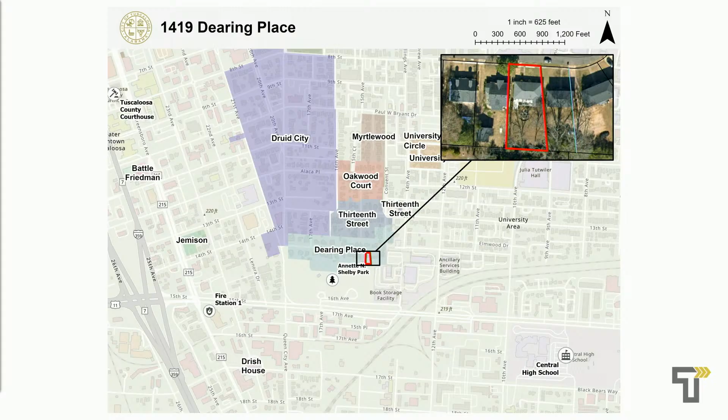This is coming to you tonight as a violation case. On April 10th, 2026, the city issued a stop work order for the construction of a deck without HPC approval. But prior to the stop work order, the petitioner had replaced the existing deck, altered the orientation of the steps, and constructed most of a roof extension over a portion of the deck area. The deck sits at the rear of the primary structure and is not visible from the public right-of-way.

Tonight you're considering the approval for alterations to the existing deck. The total size of the deck will be 34 by 12 feet, not including the stairs, and will be constructed of wood. The deck extends an additional 4 feet to accommodate a new landing that's 4 by 4, with 9 sets of steps leading down to the rear yard.

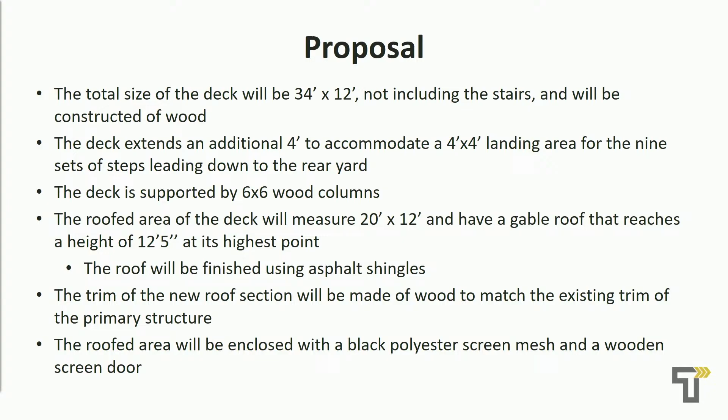It's supported by 6 by 6 wood columns, and there will be a roofed area of the deck measuring 20 by 12 with a gable roof reaching a height of 12 feet 5 inches at its highest point, finished with asphalt shingles. The trim of the new roof section will be made of wood to match the existing trim of the primary structure, and it'll be enclosed with a black polyester screen mesh and a wood screen door.

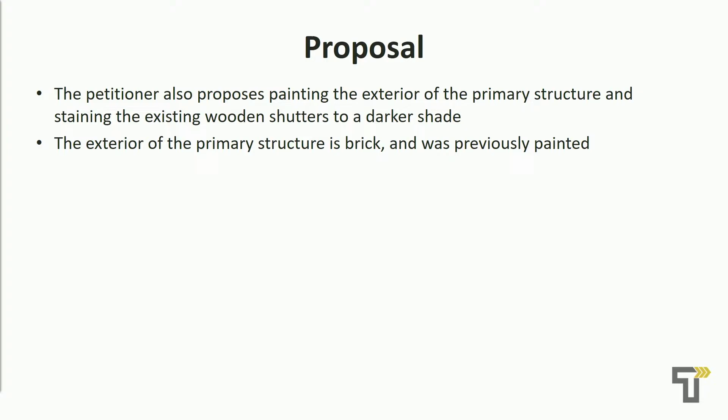The petitioner also proposes painting the exterior of the primary structure and staining the existing wood shutters to a darker shade. The exterior of the house is brick, and it was previously painted before.

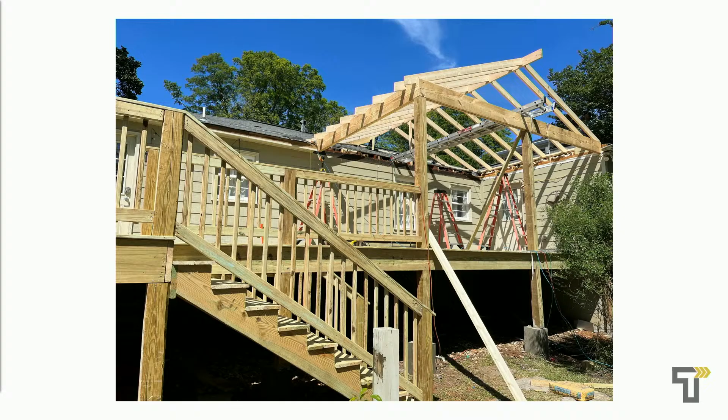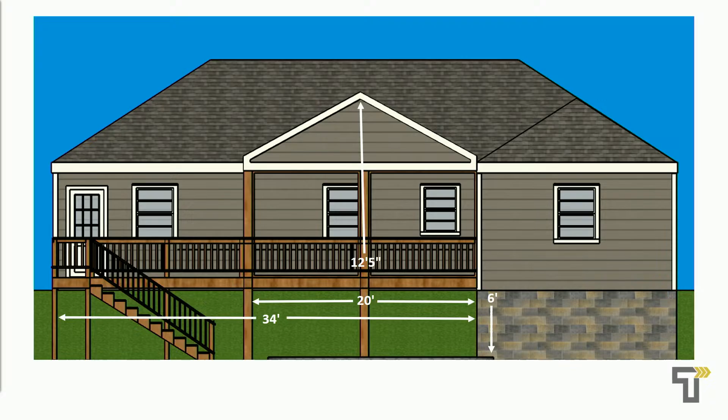Here are some drawings with dimensions of the new roof addition and that landing on the side, which will be 6 feet tall. Here are some dimensions of the enclosed portion of the deck that'll be screened in, 12 by 20, along that 34-foot deck.

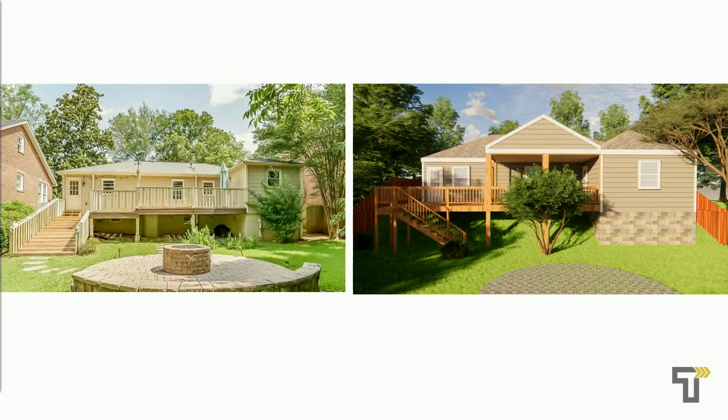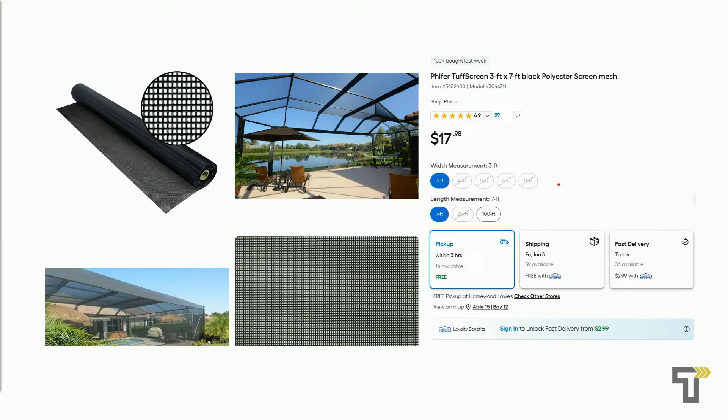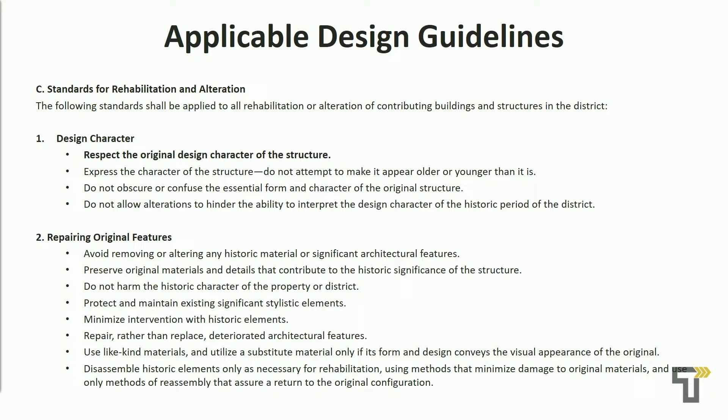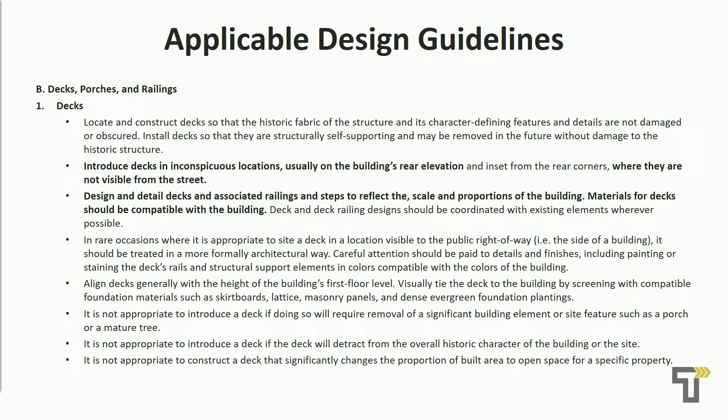Here are the design guidelines for rehabilitation and alteration: the design character should respect the original design and character of the structure, and it should relate in style, size, scale, and material to what's existing. The design guidelines for decks say they should be built on the building's rear elevation and not visible from the street. For roofs, the guidelines call for preserving the character of the original roofing material and details, and asphalt shingles are noted as an appropriate material for roofs in historic districts.

We received no public comment on this case. Are there any questions for staff? Thank you very much. Let me invite the applicant or the applicant's representative to come up, please. Is the applicant or the applicant's representative here? Yes, thank you. If you wouldn't mind, could you state your name and address for the record, please?

My name is Brendan Shirley. I'm representing 1419 Dearing Place. Thank you very much. So is there anything you'd like to tell the commission about the project?

The project was previously started by a previous contractor who was unlicensed. I'm picking it up with the appropriate license to do it properly. As far as that goes, I just need to get everything done so I can get a roof closed, because right now, other than a tarp, that's the only thing protecting the house and keeping it from leaking.

Understood. There was a stop work order put on the project. Do you know why the owner didn't come to the Historic Preservation Commission to get work approved ahead of time? As far as the homeowner has expressed to me, she didn't know that she needed a permit. The original contractor was supposed to do the appropriate measures so I'm now picking up the slack, but they dropped the ball on getting everything approved before starting work, which is where we're at now. So unfortunately, I'm here to make it right.

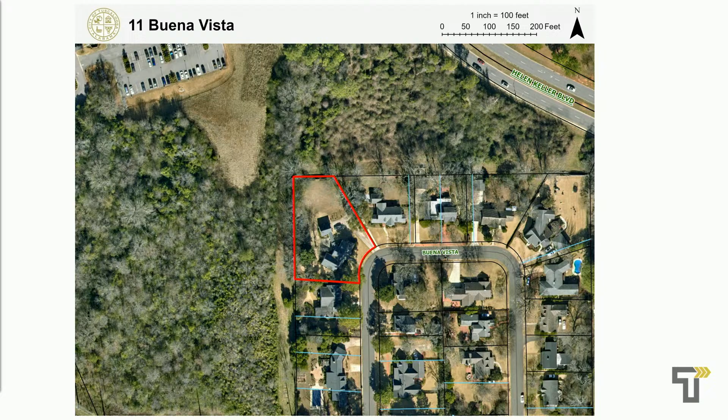This existing detached garage is 20 by 22 feet, and it was built using cementitious siding, two wooden windows, a fiberglass door, asphalt shingles, and wooden shutters.

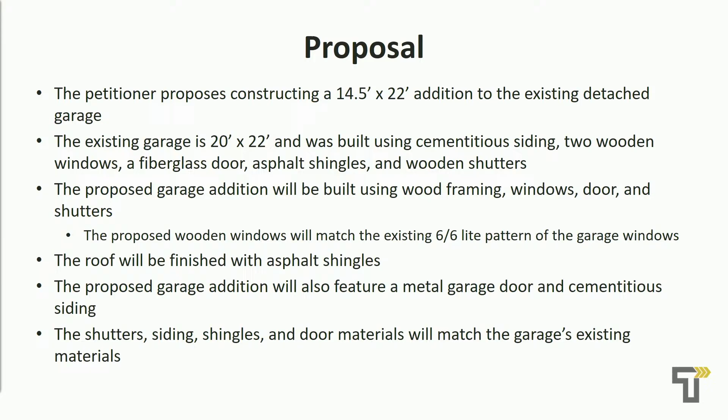The proposed garage addition will be built using wood framing, windows, door, and shutters. The proposed wooden windows will match the existing 6/6 light pattern currently on the garage. The roof will be finished with asphalt shingles, and the addition will also feature a metal garage door and cementitious siding. The shutters, siding, shingles, and door materials will match what's existing on the garage.

To accommodate this addition, the petitioner also proposes extending the existing concrete driveway. The driveway section will be concrete to match the existing driveway material.

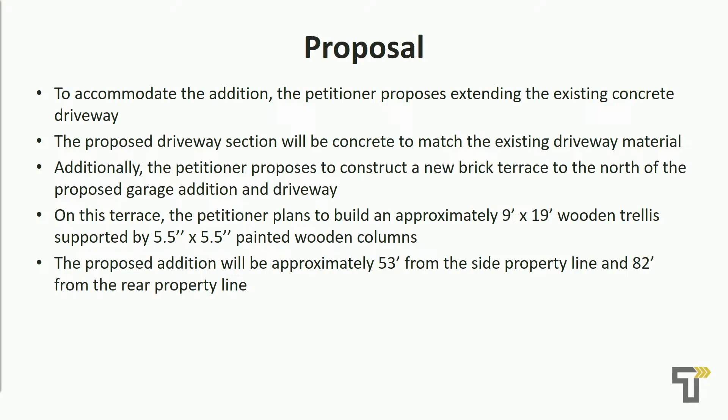Additionally, the petitioner proposes to construct a new brick terrace to the north of the garage addition and the driveway. On this terrace, the petitioner plans to build an approximately 9-foot by 19-foot wooden trellis supported by 5.5 by 5.5 painted wooden columns. The addition will be approximately 53 feet from the side property line and 82 feet from the rear property line.

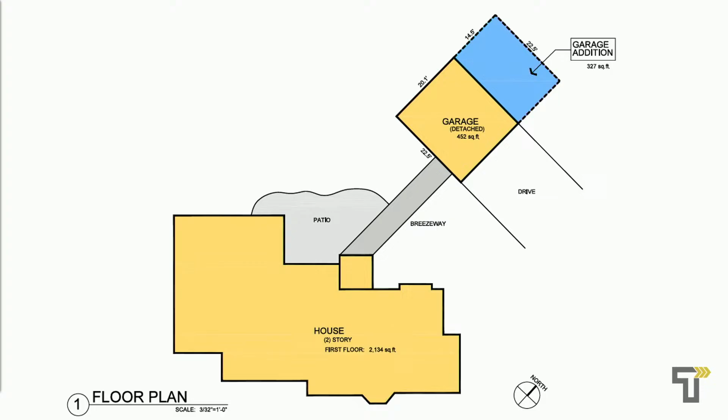Here's the east elevation, what you see when you are going into the property. You can see the front of the garage connected to the breezeway. And the proposed elevation, on the right, you'll see the addition to the garage with those asphalt shingles, the fiber cement siding, and the garage door. These are those two elevations side by side, existing on your left and proposed on the right.

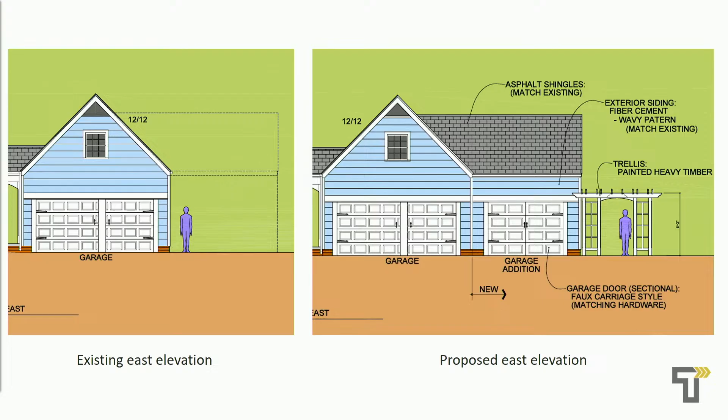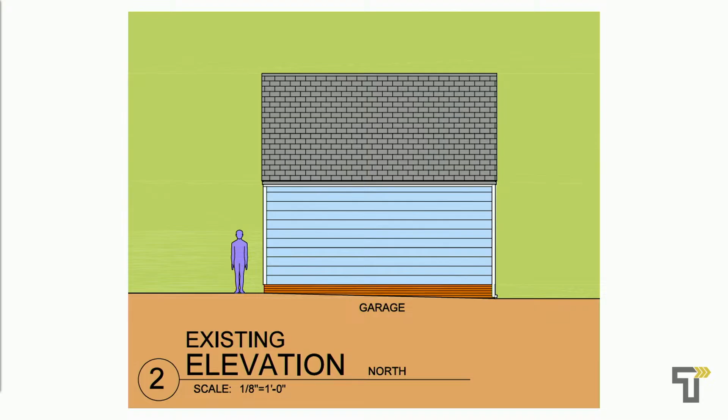Here is the north elevation, the side of that detached garage, the existing elevation drawings, and then the proposed. You can see the door, and on the side, the trellis is on that brick patio with a new window and wood shutters to match existing. Again, side by side, existing and proposed elevations.

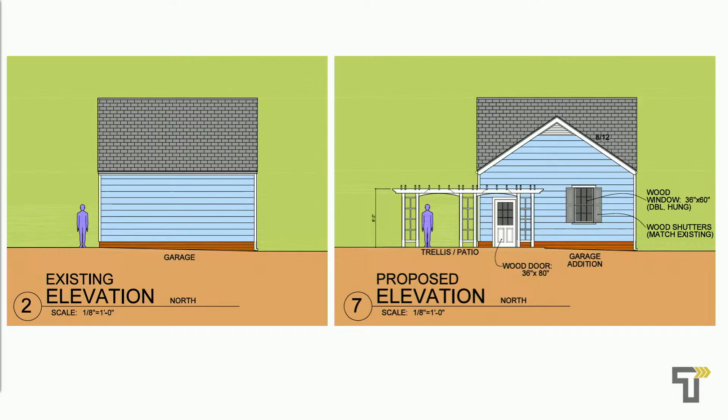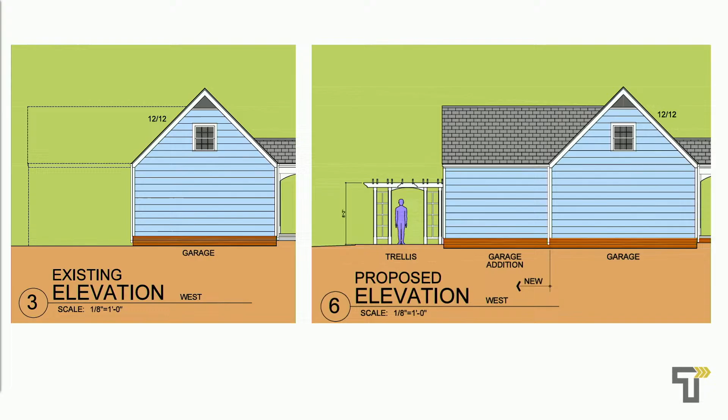Here's the west elevation, so the rear of that detached garage, in a drawing. Here's the proposed elevation, just showing that garage addition with the adjacent trellis, and compared side by side, existing on your left and proposed on your right.

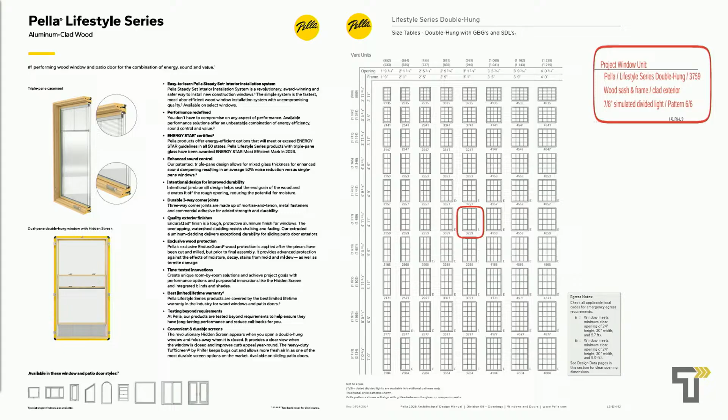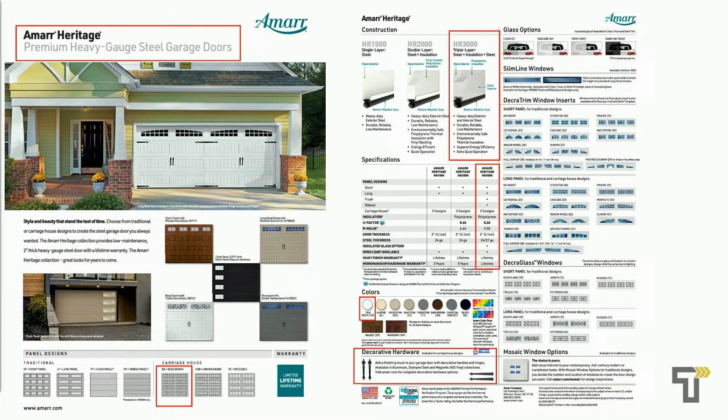Here are the spec sheets for those aluminum clad wood windows, for the exterior door and the fiber cement siding, and here are some spec sheets for those asphalt shingles, and for the metal garage door that will be placed on the addition, and a drawing of what that door will look like.

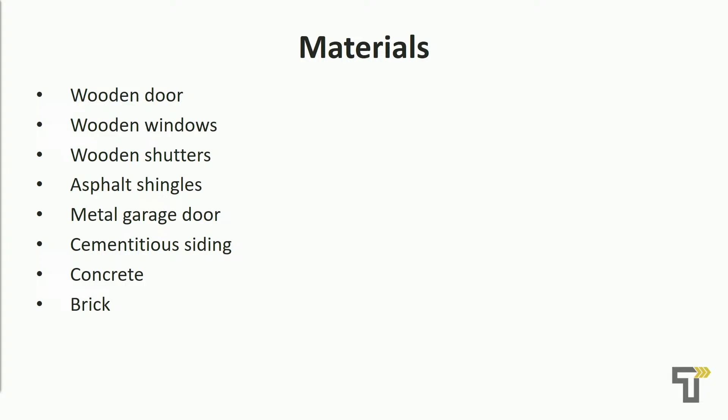Materials for this project include a wooden door, wooden windows, wooden shutters, asphalt shingles, a metal garage door, cementitious siding, concrete, and brick. Here are the design guidelines for rehabilitation and alteration.

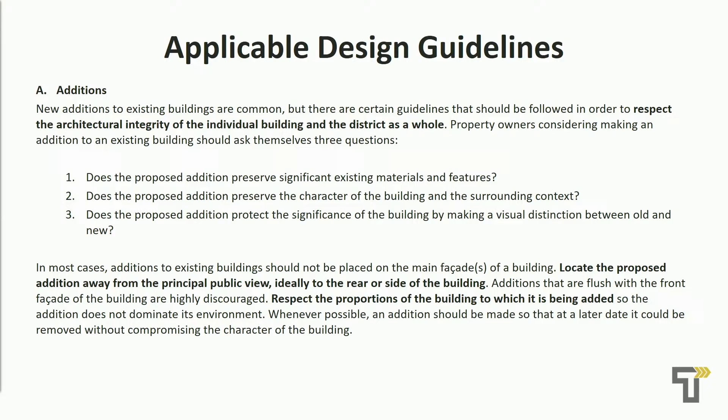For additions, they should preserve and respect the architectural integrity of the individual building, and they should be away from principal public view, ideally to the rear or side of the building, and respect the proportions of what's existing.

We received no public comment on this case. Are there any questions for staff?

Couple of quick questions. So with the windows, are they wood or are they aluminum clad wood? The proposed windows are aluminum clad, and the applicant can confirm, but the existing, what staff knows, is wooden windows. Okay, I just thought I'd heard that they were matching with wood in the narrative part, and then when I saw the spec sheet, it said aluminum clad wood.

The other question is, whoever is in control of the PowerPoint, can you show us the drawing of the garage doors, and then let's go back to the garage door spec sheet for a quick second.

And then can you show us the elevation? There's just one little thing I thought I saw. Okay, thank you.

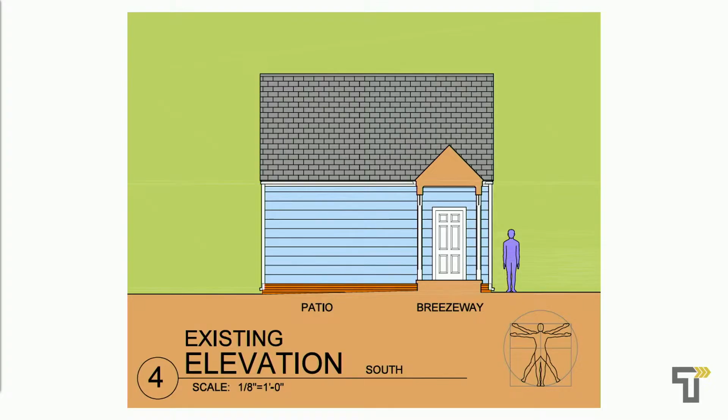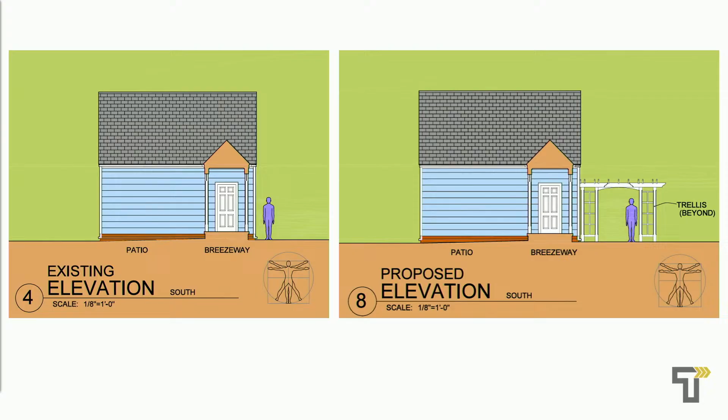Yeah, and so the existing window is wood. And then the proposed window will be wood. Let's make it wood. Oh, okay, wood. All right, thank you.

I guess I don't quite—we're matching the existing materials exactly, I think. Okay. And that's the general intent. That's great, thank you. That's really, I'm open for questions. Do we have any other questions for Mr. Fitz? The material that's going to be used, the cementitious siding, does it match the current pattern on the original house?

So we'll have essentially identical appearance with the new materials, yeah. And it's painted, so it really will be. Any other questions for Mr. Fitz?

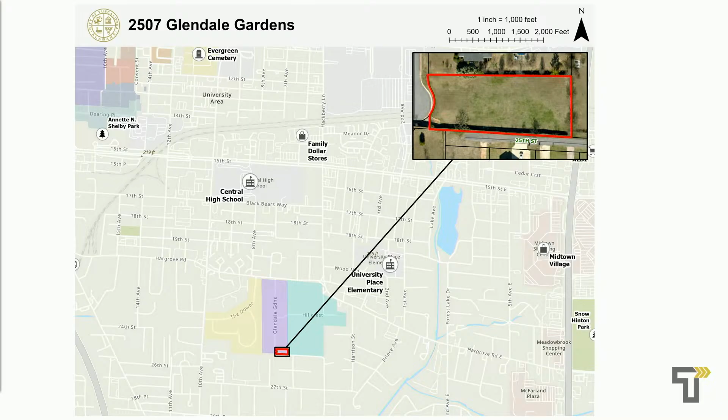The proposal includes constructing a 2,215 square foot, two-story single-family dwelling with a new driveway to replace a home that was previously destroyed in 2011. The home will be 28.5 feet tall at its highest point, and set back 50 feet from the front property line. It will be constructed using HardiePlank batten vertical siding, aluminum clad wood casement windows, a brick foundation, fiberglass asphalt shingles, metal garage doors, composite outdoor lighting, and wooden windows.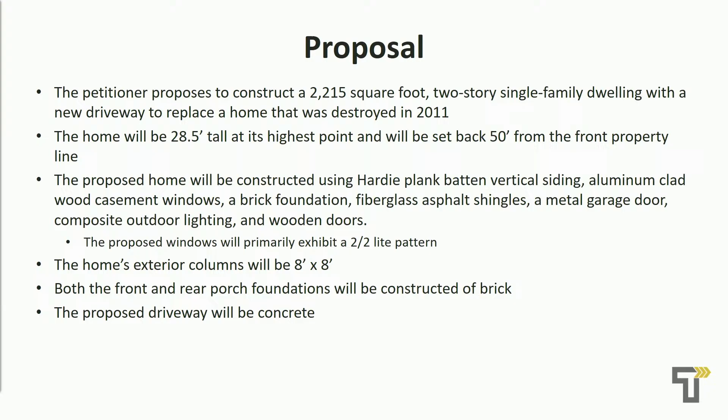The light pattern for these windows will primarily be a 2/2 lite pattern. The home's exterior columns will be 8 feet by 8 feet, and both the front and rear porch foundations will be made of brick, with the proposed driveway being concrete.

Here's some elevations for the proposed house. As you can see, top of plate is 28.5 feet tall, with architectural shingles, Hardie plank siding, aluminum clad wood windows, and a brick foundation with wooden doors and columns.

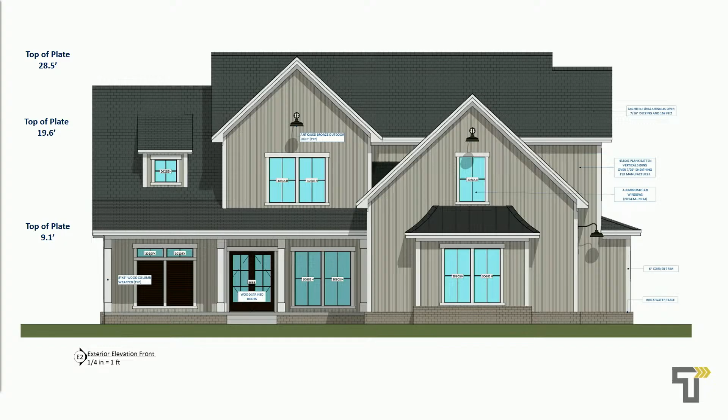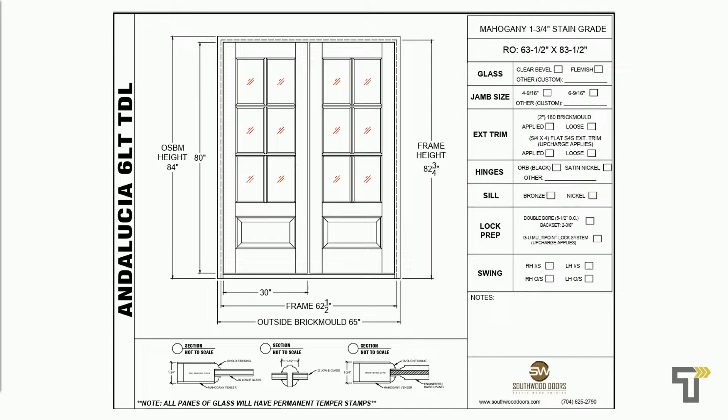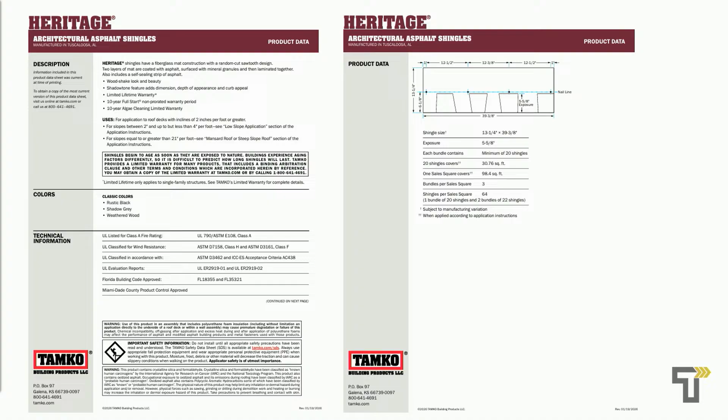So the materials for this project include Hardie plank siding, aluminum clad wood windows, brick, fiberglass asphalt shingles, metal garage door, composite outdoor lighting, wooden doors, and concrete.

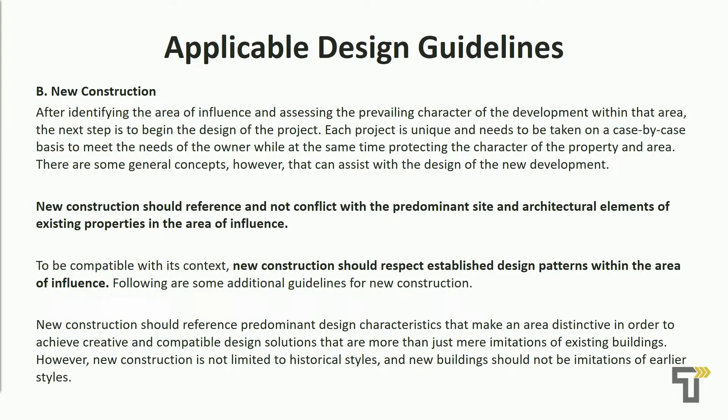Here are the design guidelines for new construction, that they should reference and not conflict with the predominant site and architectural elements of the existing properties, and that they should respect the established design patterns within the area. That the setback, scale, mass, and size of a structure should be as important as the style or decorative details, and that the public facades are also compatible with those of adjacent contributing buildings.

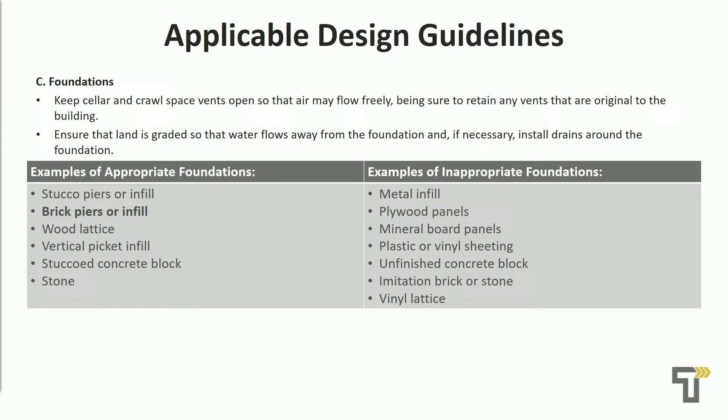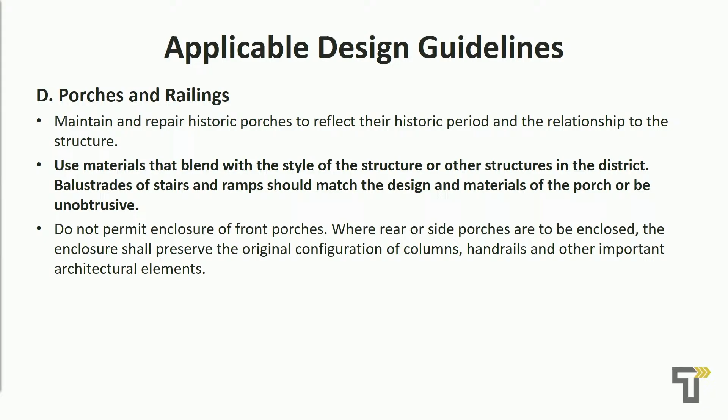Quick question about setbacks. So you mentioned the setback of this property at 50 feet and the one adjacent property at 70 feet. That's correct. What's the overall setback in the neighborhood? So I'm not sure about the rest of the neighborhood, but the one just to the north is 70 feet setback.

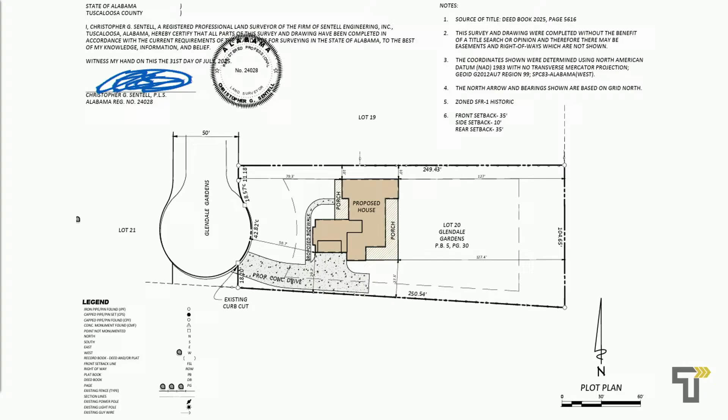And then you can see, as it's a cul-de-sac, you kind of push in a little bit, so it might align a little bit better than what it's showing on paper. We're looking at an overview of that street with the cul-de-sac, and I think the 50 feet, even though the others look pretty even at 70 feet, given the nature of that cul-de-sac, it doesn't look out of place. I don't think it will with that cul-de-sac. Okay, thank you. Other questions for staff?

All right, thank you very much. Let me invite the applicant to step forward, please. And if you could state your name and your address for the record, please, sir.

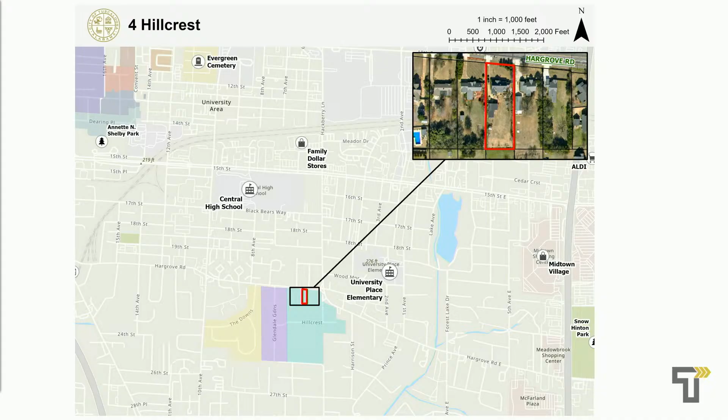Here we have an image of where that property is located in its historic district, facing Hargrove Road, as you can see from its aerial. Here's the subject property, a view from the street, the adjacent property to the west, to the east.

The petitioner proposes installing a 12-foot by 16-foot pre-manufactured gazebo in the rear yard of the primary structure. He plans to put it on an existing 12 by 16-foot rear patio, and it'll be located 27 feet from the side property line and 175 feet from the rear property line. It won't be visible from the right-of-way, and it'll be made using an aluminum frame with a steel hardtop roof with polyester privacy curtains. Here are the dimensions of the gazebo, some renderings, and some of the materials it's made with.

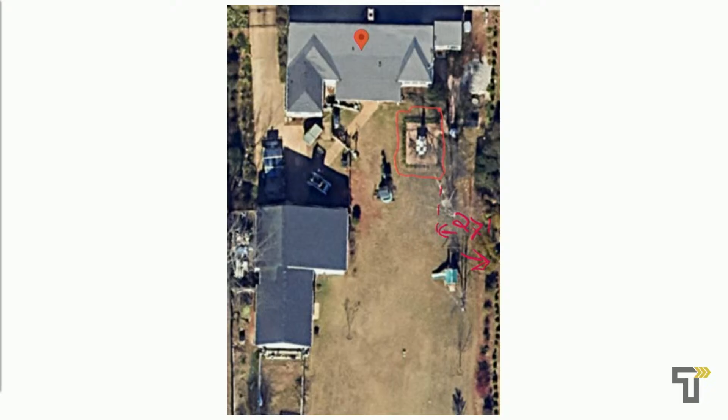Here's a site plan showing that it'll be 27 feet from the side property line, and circled is where that existing patio is, where the petitioner proposes placing the gazebo. Here are some photos of the existing patio, and here's a spec sheet of that pre-manufactured gazebo.

Materials include a metal gazebo. Here are the design guidelines for accessory structures: that they be set back at least 5 feet from the side property lines and be located to the rear of the main building. We received no public comment on this case. Are there any questions for staff? It appears we have none.

Thank you. Let me invite the applicant to step forward, or the applicant's representative, and please state your name and your address. Good afternoon, my name is Edward Prunty, and my address is 4 Hillcrest, Tuscaloosa, Alabama.

Well, thank you for coming tonight. Is there anything else you'd like to tell the commission members about your project? Well, it's intended to be a permanent structure that is withstanding of Alabama's changing weather.

Can we go ahead and put an image up so we can look at it as Mr. Prunty talks about it? Here we go. I've replaced a number of umbrellas on this patio, and this was a Mother's Day gift, but it's a more permanent structure that, as weather changes, will still be there, and there won't be debris to pick up later.

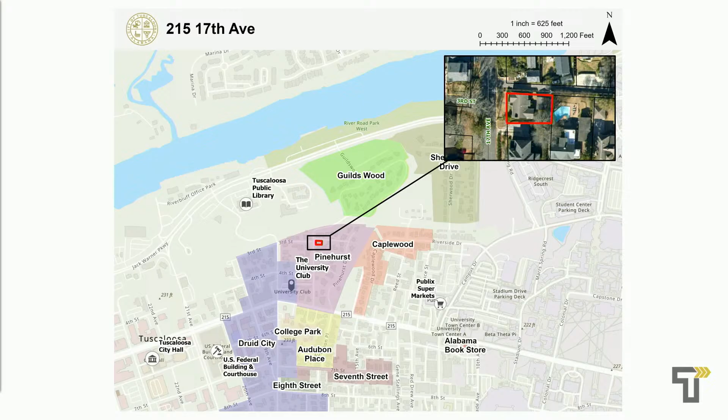Okay, our next case is HPC 2726, Casey Branton's petition for a certificate of appropriateness for the construction of a parking pad on the property located at 215 17th Avenue in the Pinehurst Historic District, Council District 4. Here we have where that property is located within its historic district, at the intersection between 3rd Street and 17th Avenue, as you can see on its aerial. Here's a view of that property from the street and the adjacent property to the south.

So the petitioner proposes adding a concrete pad in the rear yard of the primary structure. Currently there's an existing 35-foot by 16-foot covered concrete parking space in the rear of the primary structure, and the petitioner proposes adding 4 feet to that existing pad. At the end of that pad, it will measure approximately 4 feet by 16 feet, and the rear parking area will take up 33% of the rear yard.

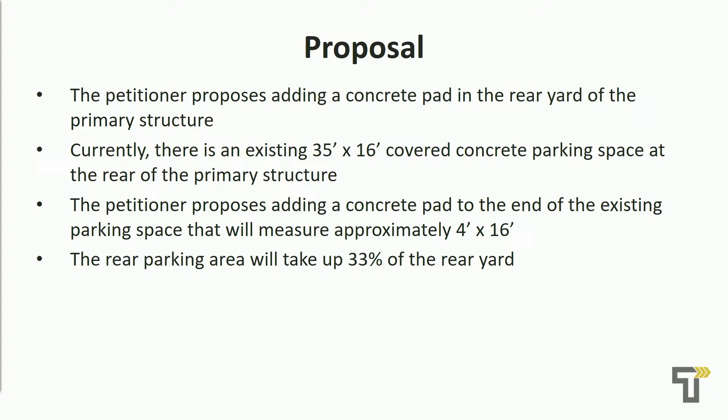Here we have a survey of that property. In gray, you'll see the proposed parking and existing. The proposed is what's below the gray, where it says proposed concrete, and the gray is what's existing. To the side, you'll see a note saying the total area will be 33%. Here's a picture of what that rear parking looks like. It's a covered parking space, and beyond that you can see the patio there.

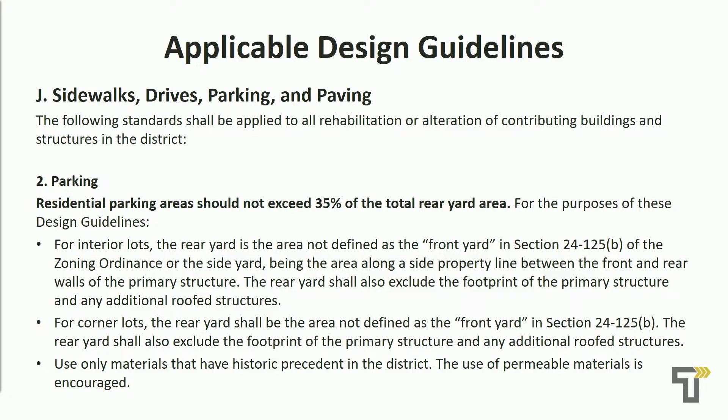This is off of an alley. The materials include concrete for that parking pad. Here are the design guidelines for parking, saying that residential parking area should not exceed 35% of the total rear yard area, and that they should minimize the presence and appearance of all parking areas visible from the public street. Here are the appropriate materials, and concrete is listed as an appropriate material for parking.

We received one public comment in opposition to this case. Are there any questions for staff?

Can you address the concern in that opposition? Yes, so as you may have noticed in the packet, on the certificate of appropriateness application, it said that they were proposing parking at the front of the house. We've worked with the applicant, both planning and engineering, to come up with a better solution, and this is our final proposal, what you're considering tonight. So the opposition was in terms of parking in the front, which is no longer part of the application.

That's correct. One last thing - we're talking about viewing from the public street, public right-of-way. The alley beside the house is not considered a public street or public right-of-way, correct? Right, it's considered a public right-of-way; however, alleys are typically... but the purpose of it is to put the things that are undesirable back there. Alright, just wanted clarification from you. Thank you very much.

And can we see the site plan one more time, please? So that proposed bit of concrete will come right up to that patio area, is that right? That's correct. Okay, yes, I have no further questions for staff.

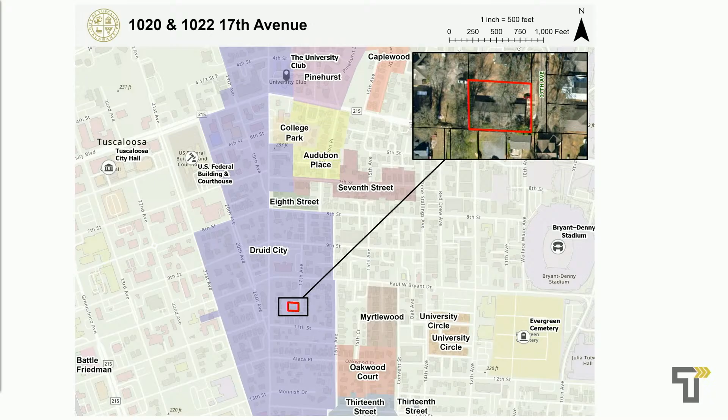So here we have a view of where that property is located in its historic district. This is a duplex located at the end of 17th Avenue. Here's an aerial view of that property. Here's a view of that property from the street, and the adjacent properties to the east, to the north, and to the south.

So the petitioner proposes replacing all 22 windows on the primary structure. The original windows are wood and they're going in with PVC, designed to match the appearance and the light pattern of the windows that they plan to replace.

Here are some images of that window. This is the 1020 side of the duplex, and then the 1022 side of the duplex. More windows on that front elevation, and the rear, and the side.

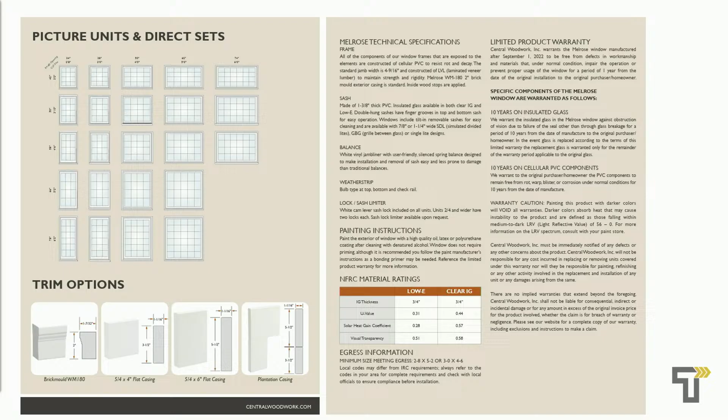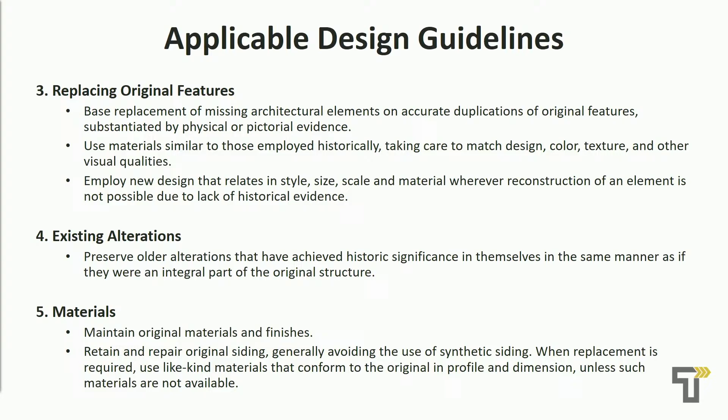Here are the spec sheets for the PVC windows with some shop drawings on the side. Materials for this project are PVC windows. Here are the design guidelines for rehabilitation and alteration, and for windows, cellular PVC is an appropriate material.

We received no public comment on this case. Are there any questions for staff?

I do, and maybe the applicant can answer this, but can you tell me the difference between the cellular PVC that's approved and the vinyl extrusion mentioned in the spec sheet? The applicant brought more information about the windows, so we could defer those questions. So is it a vinyl window? It's cellular PVC from what the spec sheets say. Can we see that spec sheet? Does it say extruded vinyl on the spec sheet? It did on the application.

On the application, it says our white vinyl, but look at it - this unique vinyl extrusion. They brought a physical window, if that helps as well, to determine what the material is, but this says cellular PVC. It also says vinyl. Well, that one part says 'this unique vinyl extrusion,' but everywhere else it says it's Melrose PVC, unlike vinyl windows. We can talk to the applicant about that and keep this handy. Another thing, just to clarify, in those pictures you could see some damage to the structure - there was a tree that fell on the structure, and they've gotten some expedited approvals to fix that portion.

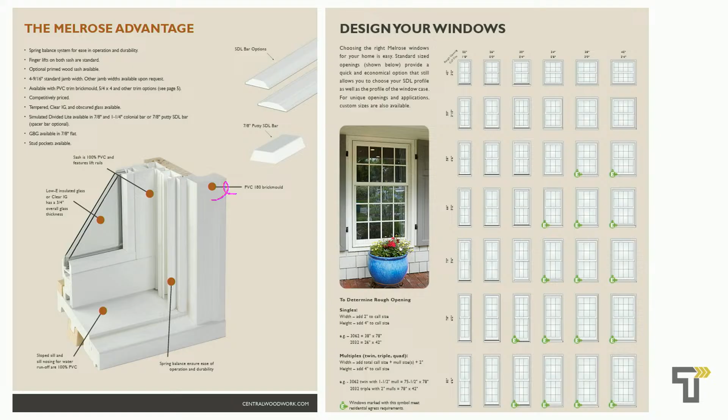That is what the original approved HPC cellular PVC window was made of completely. It was not extruded vinyl, it was solid pieces. It was built as if it was a true wood window. And that was the only PVC window that I understood was ever approved by HPC.

And so the fact that now we're seeing extruded PVC, which is a vinyl -- this to me is an extruded vinyl window, which to my knowledge has not been approved by the HPC. As I said, the Monarch window, the original one, was made out of solid parts. You didn't have all that molded, extruded bits and pieces. It was solid, just like that is, made just like a wood window.

So other than the PVC being solid PVC versus wood, there was no difference in how it was constructed. I'm afraid that, to me, this is a vinyl window. It clearly says it's vinyl. We know it's extruded, we know it's not built like a historic wood window would be built. And so I do not think that this is an appropriate thing to approve.

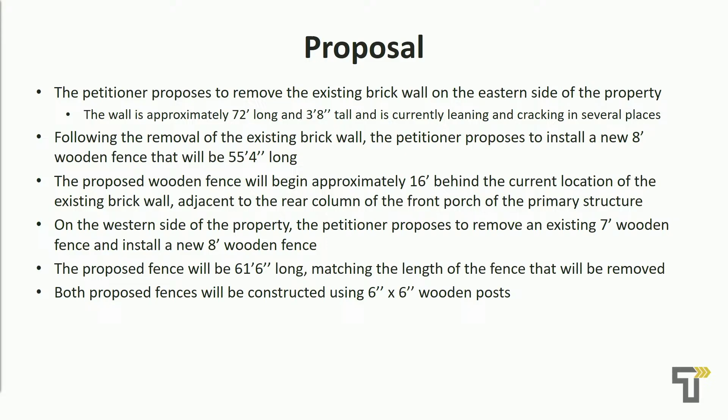On the western side of the property, the petitioner proposes to remove an existing 7-foot wooden fence and install a new 8-foot wooden fence. The proposed fence will be 61 feet long, matching the length of the fence being removed, and both proposed fences will be constructed using 6x6 wooden posts.

Along the southern property line, the petitioner proposes adding cinder block to an existing rear wall. The existing wall is also cinder block, 5 feet tall and 22 feet long. The petitioner proposes adding 3 feet of cinder block on top to make it 8 feet tall, and it'll be painted to match the rest of the existing wall.

Additionally, the petitioner proposes installing a metal security gate across the 9-foot wide driveway. The gate will be aligned behind the driveway and the starting point of the proposed fence on the eastern property line, and it'll be 6 feet tall at its center.

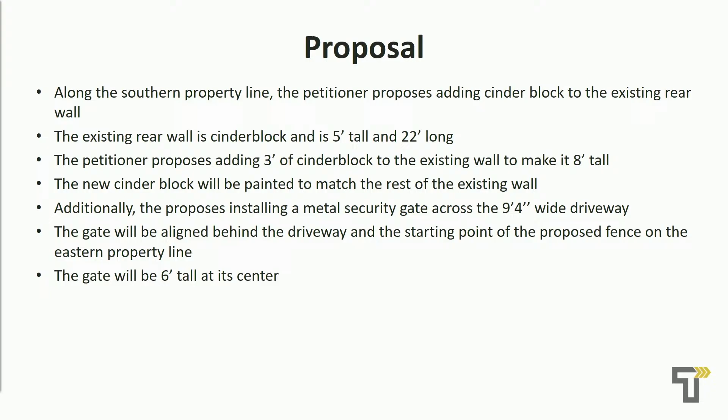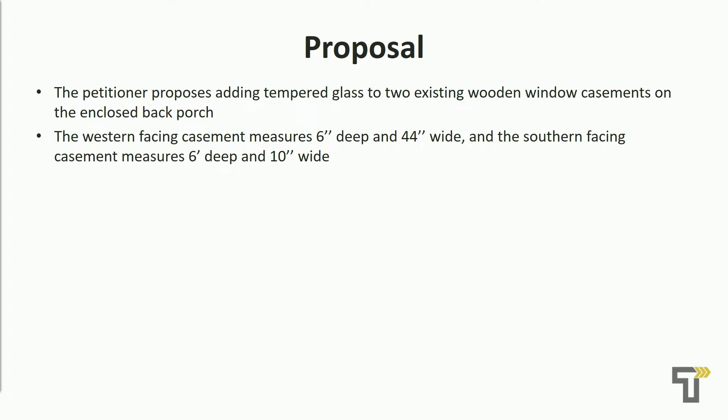The petitioner also proposes adding tempered glass to two existing wooden window casements on the enclosed back porch. The western-facing casement is 6 inches deep and 44 inches wide, and the southern-facing casement is 6 inches deep and 10 inches wide.

Here's a site plan of the property. The red lines show where the petitioner is proposing to install a new 8-foot wooden fence. On the eastern side there's an existing brick wall, and on the western side there's an existing wooden fence. In the back, the blue line marks where the existing cinder block wall is located. It's 5 feet tall, and the petitioner wants to make it 8 feet tall by adding more cinder block on top. Here's a site plan of the property.

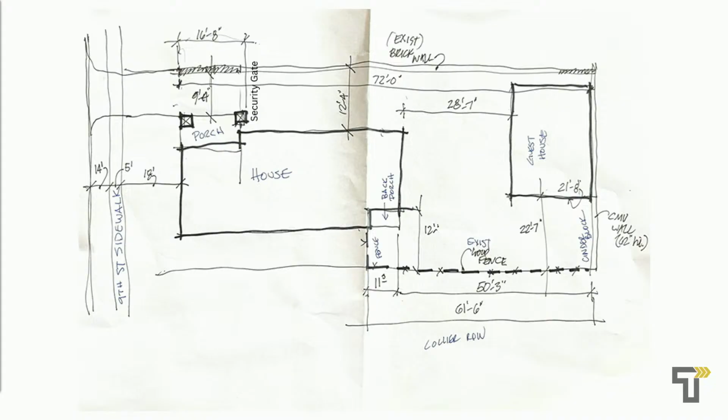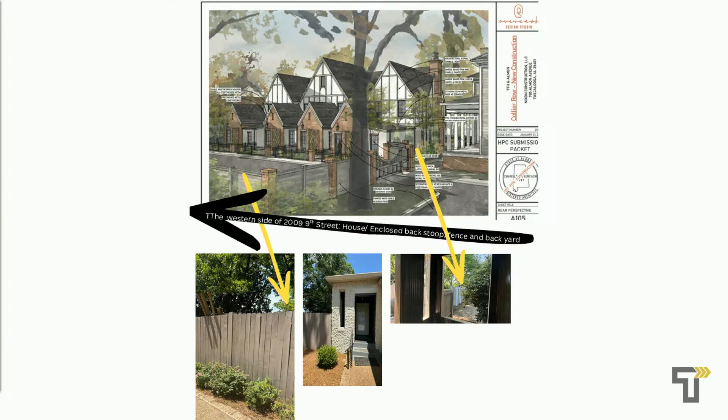Here's a drawing of that gate, or that fence. It'll be similar to the picture in the middle. On your right side is the existing fence that's currently on the western side of the property.

Let me just ask, is that finished side on the applicant's property, or are they on the other side? The petitioner can confirm.

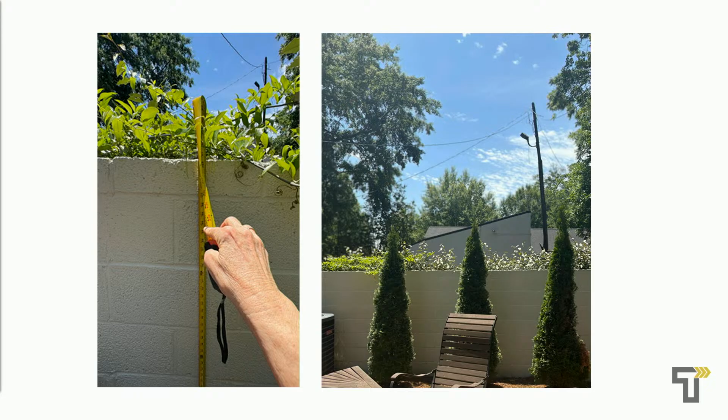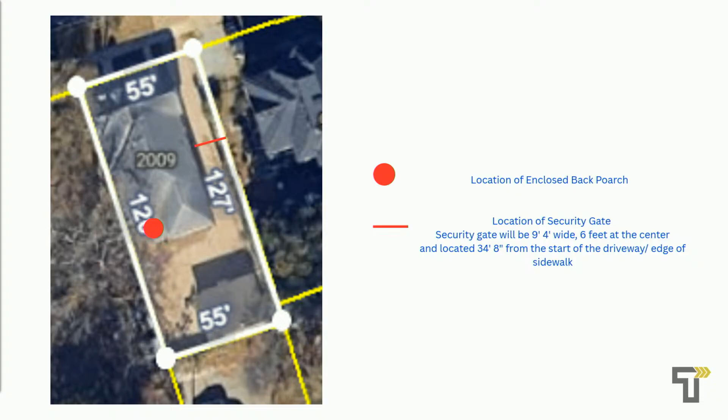Here's another image of where that new security gate will be placed, aligned with the brick wall that will be removed and replaced. The new fence will start there, aligned with that back column of the patio, and that's where the gate will be placed.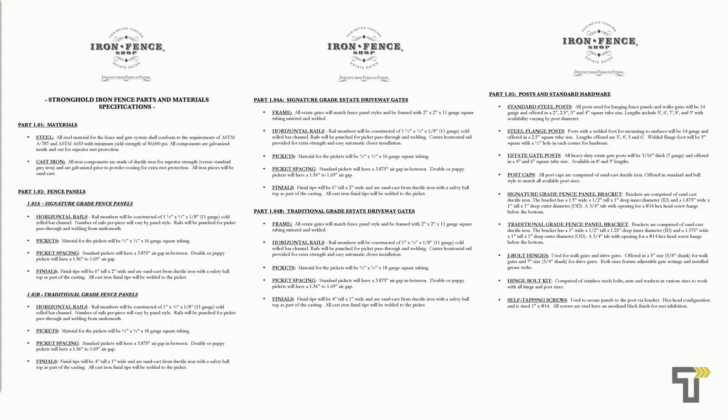Here's an image of that gate, an example image. Another one. Here's a spec sheet for that gate. It's steel and cast iron, predominantly steel, with some cast iron parts.

Here are images of those existing wooden window casements that the petitioner proposes to install tempered glass in.

And here is where that enclosed back patio is. Let me draw. So you're coming in from 9th Street here to the back. This portion is enclosed. This is a window, the smaller one, and the other window would be on this wall. So 2 windows. And these currently have glass in them? They do not, it's just the casement.

And here are some more photos. What you see here from this perspective, this is all 905 Almon Ave, where that parking will be placed for the adjacent townhome development.

Sorry, could you repeat that? Yeah, what I highlighted kind of poorly here, this is from the perspective of 905 Almon Ave, where that rear parking will be placed. That makes sense.

Okay, so materials for this project include wood, cinder block, a metal gate, and tempered glass. Here are the design guidelines for rehabilitation and alteration.

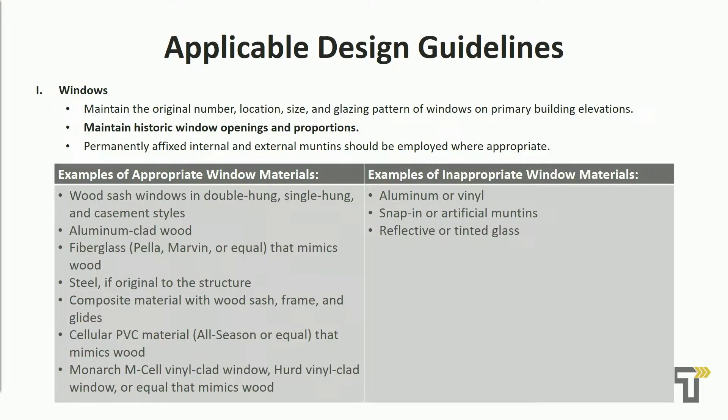For windows, fences and walls, they should maintain the overall continuity of the district as viewed from the public right-of-way. They should complement buildings and not detract from their character in relation to their neighbors, with the design, scale, placement, and material of the fences, walls, and gates, and they shouldn't generally exceed 6 feet.

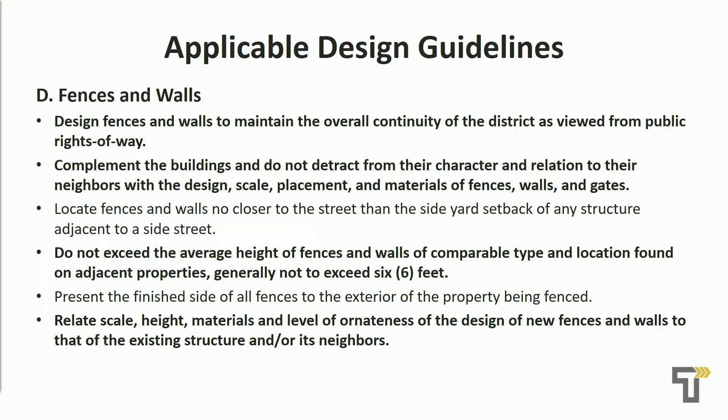I have a question about just the tempered glass part of the application. I don't recall that we have ever seen a case where someone wants to just put panes of glass in, because we're not talking about windows, we're talking about something else - I'm not quite sure how to conceptualize this, like where it lands. To me, we've got the window, we're not changing the materials, but we're putting a piece of glass in, right? That could likely be done expeditedly through staff, but we could approve that here as well, just because it's part of this application.

That's a good point. Yeah, that seemed unusual to me. At first I thought they were changing out the glass to tempered glass, but that seems like a very minor thing, and I just wanted to ask if we've ever done this or seen this before. It would be kind of equivalent to changing out a pane that breaks. That makes sense, sort of the same idea. Thanks.

I had a question for staff. One of the issues I think we should consider, so far as the height of the fence is concerned, are those on neighboring properties? You may have said it and I missed it, but are there fences on neighboring properties, and if so, what are the heights of those? Yes, there are fences on both sides of the property, on the east and the west.

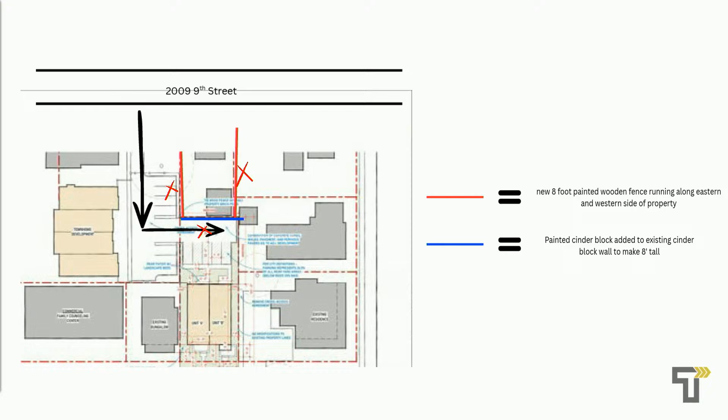Did you say an 8-foot fence? Yes, I believe so. Tricia sent an email earlier, I don't know if you could pull it up. We can't confirm the size of this fence here, but for these two fences along the Collier row, we know they're going to be 6'7". But on the right side of that drawing, the red line, we saw photos of that, didn't we?

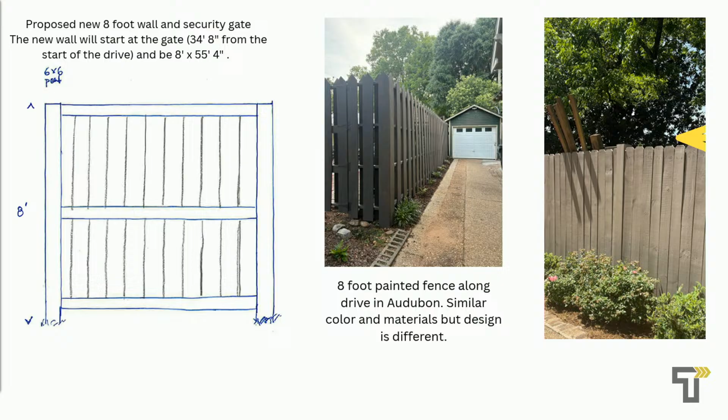Mr. Gongold, let me ask you another question about the wooden fence. So is this finished side of the fence on your view? What is your fence going to look like, the photo on the right? So we would have the unfinished side on our side, and the finished side on the neighboring side, so they would have a more finished look. I just wanted to confirm that because I wasn't quite sure from the application what was happening.

And on the windows, I can touch on that if you want. Sure, let's hear about the windows. So one of the photos, I've taken a couple extra, it's got a wood floor in there too, kind of a pine flooring. Everything inside is wood, and it looked like there was some sort of screening or glass windows there in the past. We're not changing the sizes of the openings or anything. We're really trying to protect the wood because you can see it's already starting to buckle a little bit when you walk in, so it's more about protecting the home by putting something there.

Makes sense, yeah, absolutely makes sense. Any other questions? All right, if anything else comes up, we'll invite you back. Okay, thank you very much. Have we had any submitted comment for this one?

We have not, no. So I will open the floor to public comment. Anyone here to speak in support of or opposition to?

I know you love me, right?

Kelly Fitz, 19 Audubon Place. I've been to this house, it's a lovely house, a lovely property. There are some issues with it. I know that don't fit in, like the existing concrete block wall in the back. As a designer, not an architect, I think that if they put a stucco finish on it, that would hopefully solve the problem with adding on to the existing block wall. Regarding the brick wall that they're trying to remove, it is severely leaning.

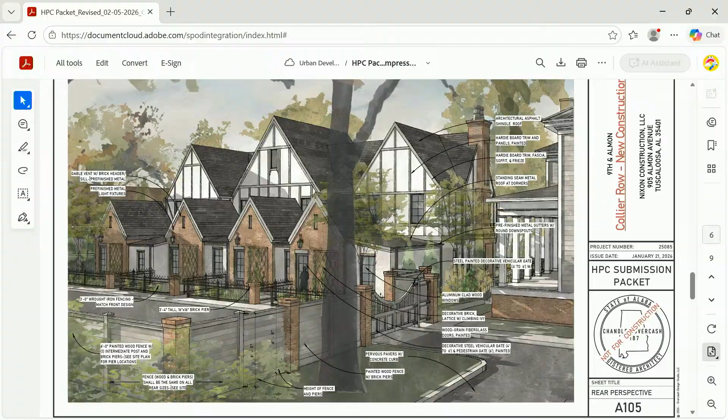But I think the main thing here with moving this along for you is really the height, because let's say you decide after looking at this and considering it, you don't want to put up that fence—it's been approved, but it's okay, you don't have to build it, if you change your mind on that.

My concern is, you've come here tonight, we've been talking about this, working through a lot of the good elements in your proposal, and I'd like to be able to see you leave tonight with something you can work with. And then should you decide you don't want to do an element of it, you see city staff, and it's very easy to change that. What's more difficult is if we were to deny the 8-foot fence, let's say, and then you have to leave and come back with another proposal. So I'm just thinking about your concerns and how we work with the design guidelines, and helping you move along.

Yeah, no, 8 foot especially on those sides. I'll take every inch you can give me against the one that's on the other side, because it is horrible looking, what she has up. So anything y'all can do on the side that's got the hog wire, we would greatly appreciate. But the 6 foot on the rest of it, yeah, I don't have any issue with that.

Understood, that's helpful. Is there anything else we want to add to our discussion here? All right, thank you so much. So we have a little modification here on the proposal. The applicant has agreed that should we deem a 6-foot fence more appropriate, he is willing to work with that, so we can proceed with that conversation then.

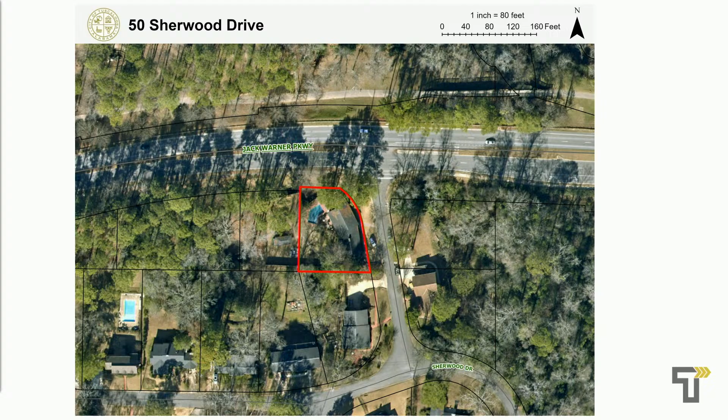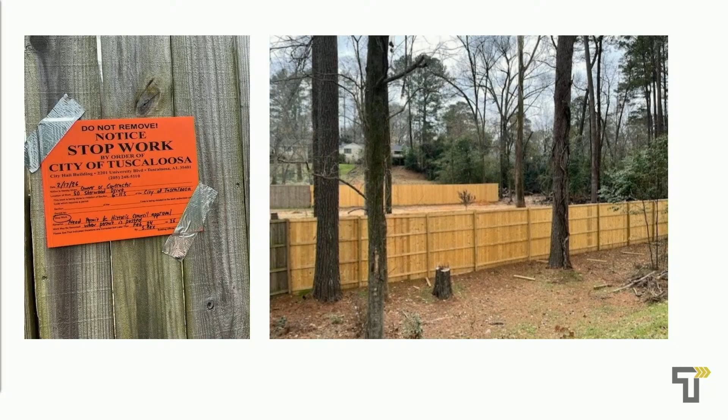Prior to the violation and the stop work order being placed, the petitioner constructed a 9-foot, 8-inch tall fence along the side property lines, with the unfinished side facing the exterior of the property. Here is what that fence looked like when the stop work order was placed back in February. Here are some more recent photos of the fence. As you can see, the unfinished side is facing Jack Warner.

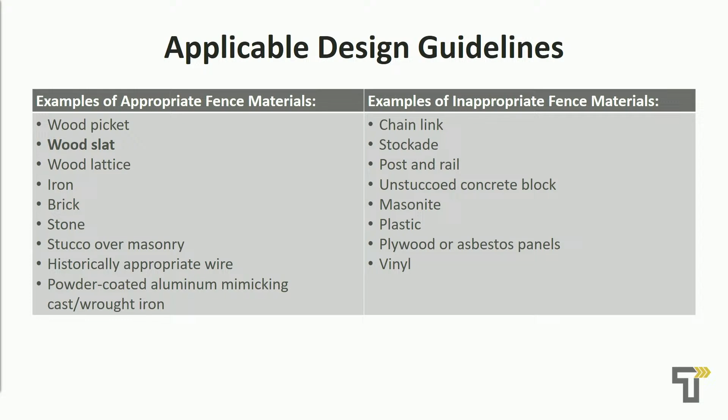Materials include wood. The design guidelines for fences and walls indicate wood slat is an appropriate material. We received no public comment on this case. Are there any questions for staff?

I have one. Go ahead. And it has nothing to do with the fence, it has to do with the lot. Is that considered two front yards because it's on a corner in the historic district?

Yeah, per zoning it would be two front yards. So the side facing Jack Warner is a front yard? It would be a front yard. Okay, so how does the fence work in terms of fences in front yards? It would be considered a front yard fence.

I think Ms. Stone is asking about restrictions or thoughts on when we deal with a front yard fence as opposed to a backyard fence. Right, so I guess you would look at the front yard fence specific guidelines. From a zoning perspective, if they get approved tonight, they would also have to go through the zoning board of adjustment for approval for the height of the fence, and I'm sorry, I tried to memorize the zoning guidelines for front yard fences.

No, I'm not saying you all just went out of zoning. Y'all don't deal with the zoning at all, but the guidelines for front yard fences, if we can pull them up, I don't think on the screen. We can pull them up on the screen for you.

I've just got a procedural question. Maybe I misunderstood something. So a stop work order's been issued. They've not filed a certificate of appropriateness? They have not, no.

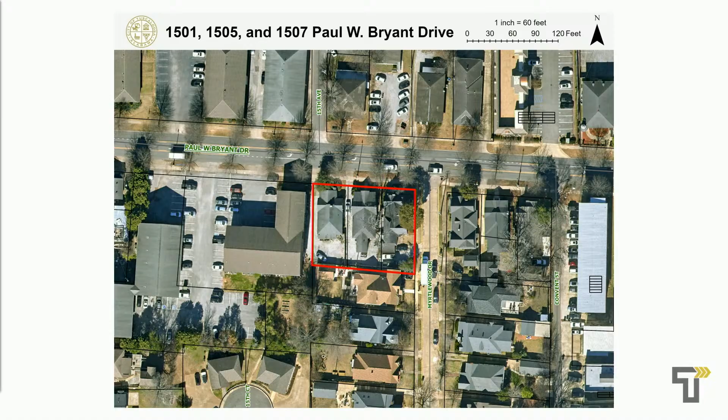On the left, you'll see the national designation for the Myrtlewood Drive Historic District, first established in 1985, and then in 2004, now we see the local designation with those three lots included in the historic district.

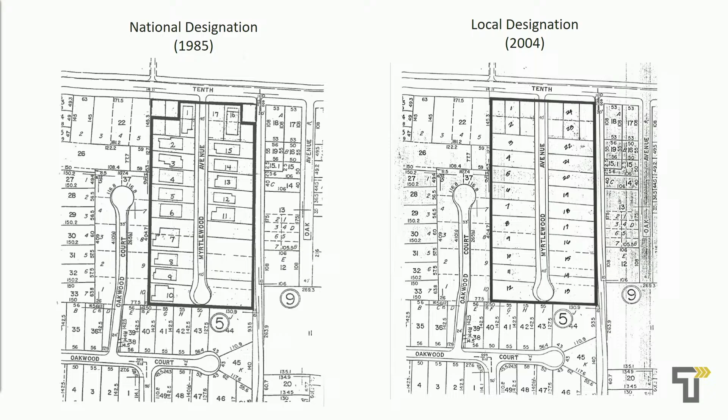So here's our statute that we're working with tonight. We're making a recommendation to City Council that the designation of any place, district, site, building, structure, object, or work of art as historic property or historic district be revoked or removed. And I'll let the applicant come and present his materials.

All right, thank you. And if you wouldn't mind stating your name and address for the record, please, sir. Victor Hamby. I'm at SB Scoggin and Kane, 2728 8th Street, attorney for the petitioner. Thank you very much.

Madam Chair, Commissioners, I appreciate the opportunity to be heard this evening. Regrettably, my client was unable to attend. He's had some health issues. He is respectfully petitioning the Commissioners to remove these properties from the Historic District on the basis that they are not part of what would generally be considered the criteria for the Historic District and should not have been placed in it to begin with. We did submit these petitions independently and ask that they be considered independently.

For the sake of time, I've got presentations on all of them, so we'll aggregate them. But when the recommendation is made, we ask that they be made independently, and you'll see why there's some variation in the properties that make them more suitable to be considered independently as far as removal. They are grounded in the same fundamental facts, though.

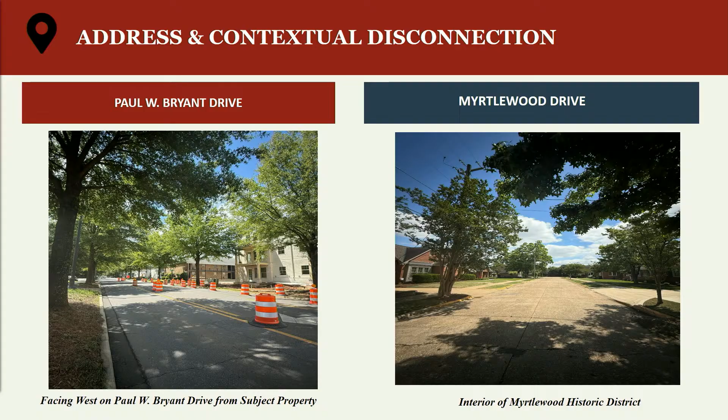Again, I'm just a layperson, more an expert in the legal area, obviously, not architecturally, but I think there's a pretty big distinction just looking at those properties for any layperson. You would walk by 1505 and 1507, and you wouldn't be able to tell that they were part of Myrtlewood. So again, several photos showing the contrast between the craftsman bungalow and the interior of Myrtlewood.